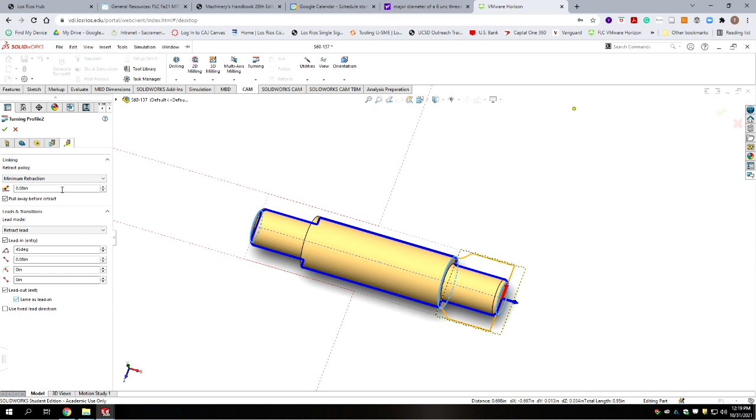Okay, so it looks pretty good. We're going to start here. It'll clean up this face. If we have any inaccuracy in depth, you're going to see a little step here. Cuts the chamfer, cuts this off, and we now have the fillet here.

Now we're going to go to the single groove. We're going to regenerate that because we need to change the references. So we've got a grooving tool, our geometry, bottom, and we're still referencing the front of the tool and the tip. Okay, we're going to the next step, and our face selection is going to be here instead.

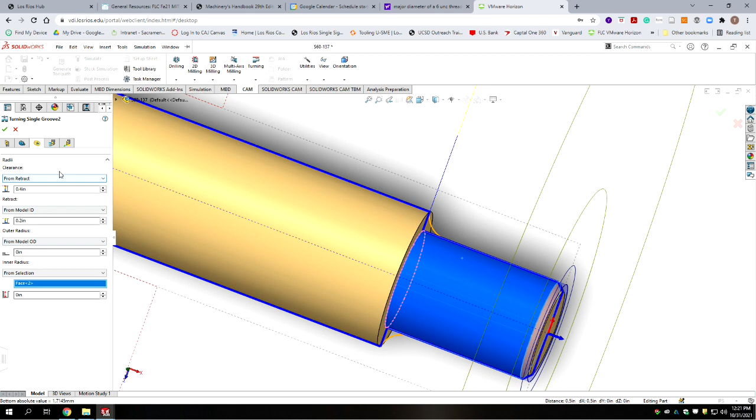Everything else stays the same, just like we did on the other side. We'll leave this all at default. We'll leave this at default. So we get a turning groove. It comes in and just cleans up the corner.

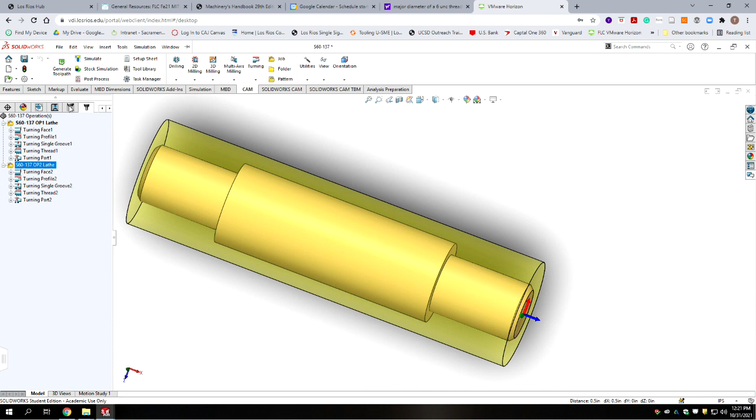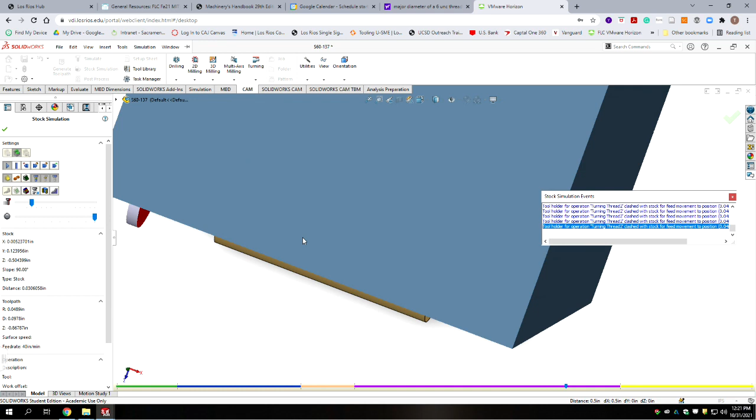So let's take a look at what we've done so far. We're going to go to a stock simulation, and it's not going to simulate the stock as if it's already milled, and that's a whole lot of gouging. Okay, so the facing operation we actually don't need. We're going to get rid of the turn face.

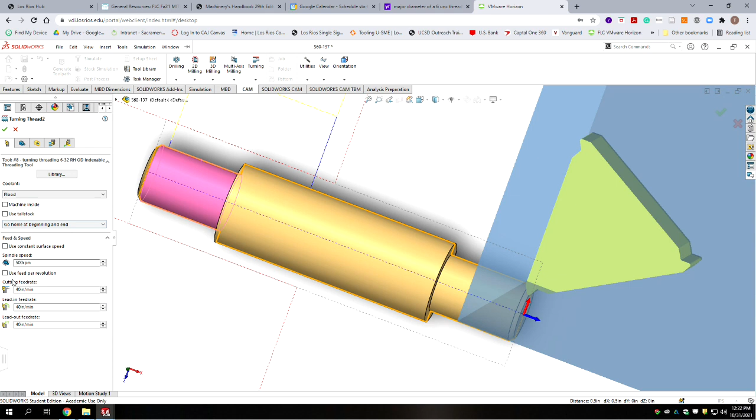And then we have our turn profile. We have our single groove. And now we need to regenerate threading because that's not where we want it. We're going to edit the thread, and we're going to go to the very first tab. Everything's good. On here, our thread is not on that face.

So I'm going to delete that face, and we're going to select the face on the opposite end of the part. We should be able to leave all these parameters the same. Now we go to the diameters, and these diameters are the same, but just to be thorough, I'm going to select the same diameter we had. Settings here should be all the same, and the settings here should be all the same.

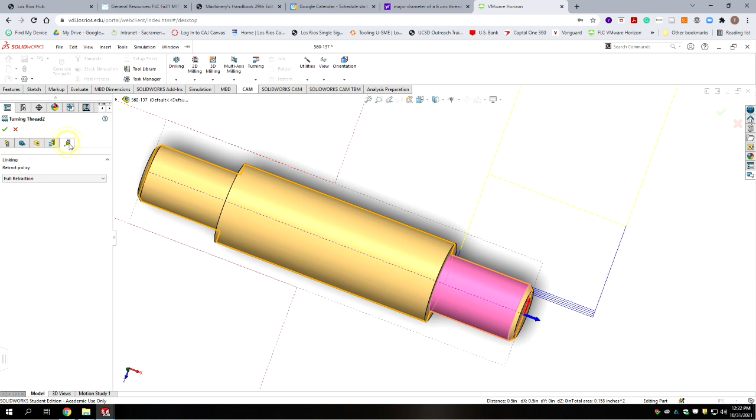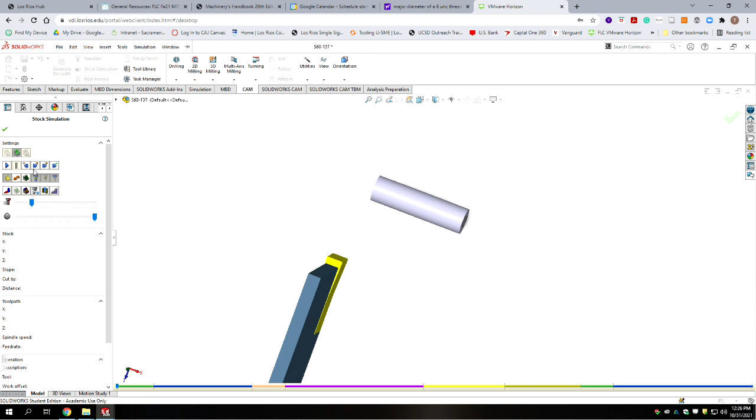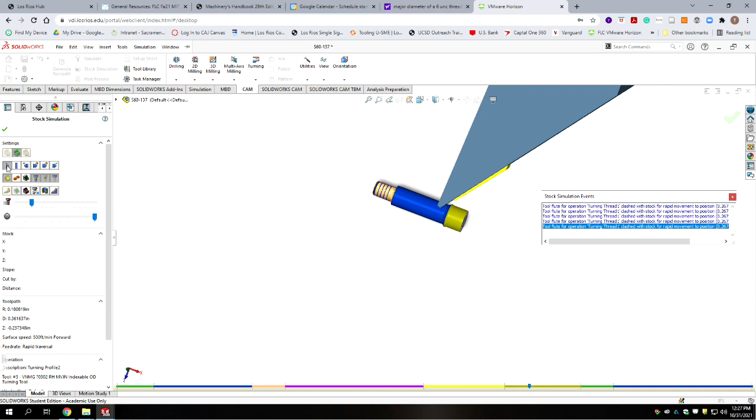We'll accept that thread. And then we don't need to part the material off, so we can delete that routine. Okay, so now we have our second program. So we're seeing the operation from both sides, as if it was rotated in the chuck, and you did the subsequent sides.

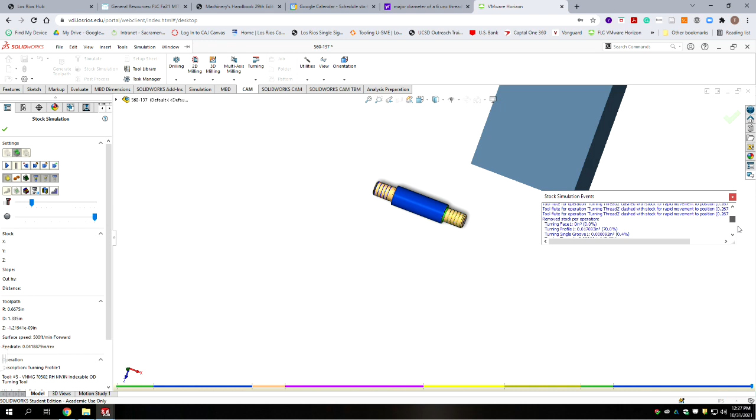Now I'm getting some collision detections on the threading. I'm not so sure it's really there, but there may be a chance that we got a little bit of a collision with an insert on the threading with the base, but from the toolpath generation, I'm not seeing it. It's pulling straight back out.

So it may be seeing that it's going to rub right up against this wall with the parameters we have in there. If we back it off just slightly, it might solve that. And it looks like the insert should be able to handle rubbing up against this wall here. Okay. All right, so what do we do next?

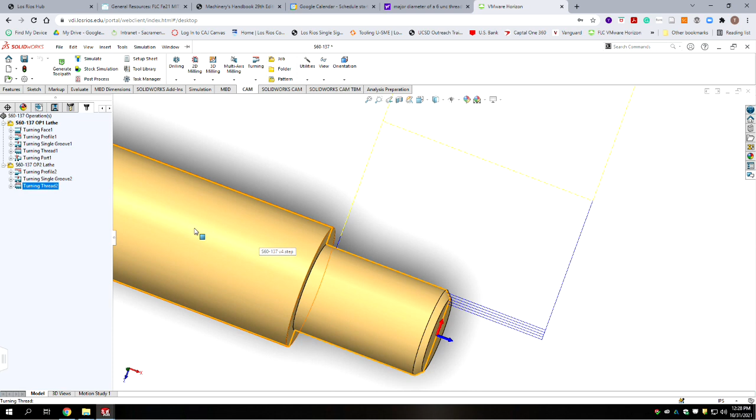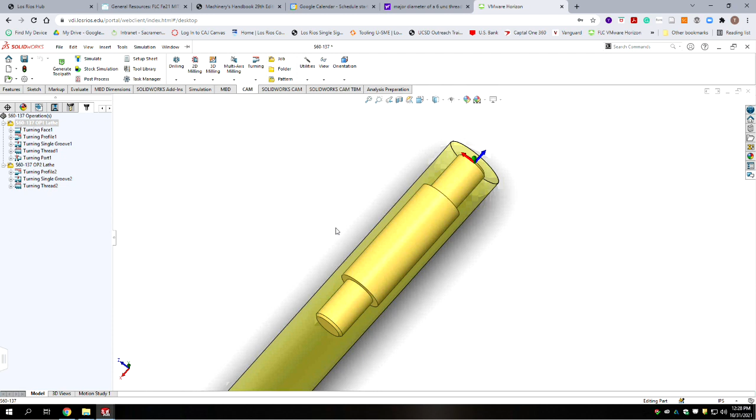So what we want to do is we want to show each respective setup sheet as if it's set up in the machine. So here we want to orientate for op 1. We want to have it looking like it's in the machine. So the red arrow should be facing away from the viewer, and the blue arrow should be pointing to the right. This might take a little finagling, but we want it to look as if it's in the chuck of the machine, and the operator standing looking from the left. And that way on the setup sheet, that'll make some sort of sense.

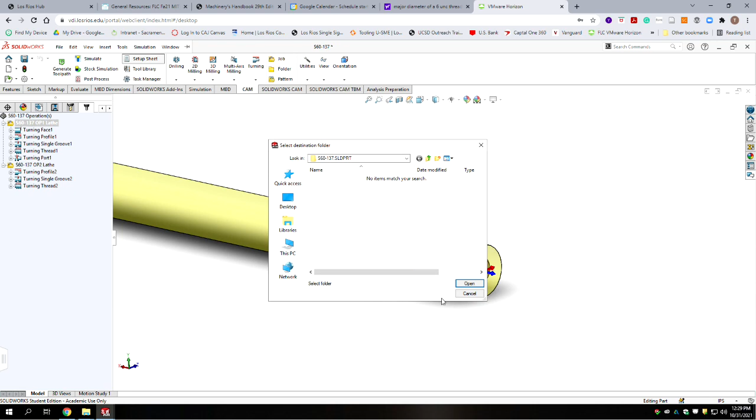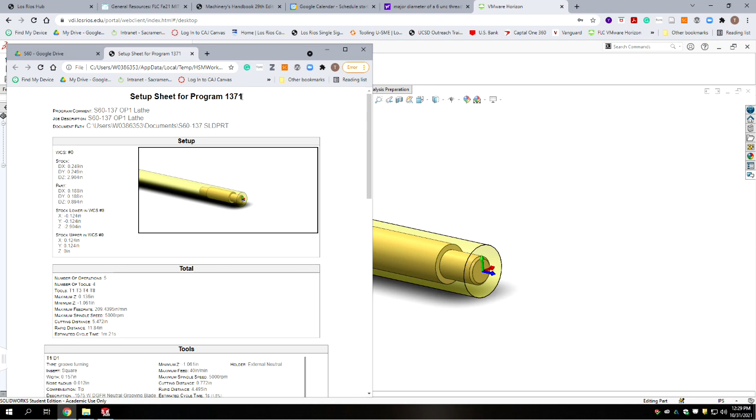Okay, so we're going to go to our setup sheet and go ahead and open it, its default location. And this gives us the image we're going to see in the setup sheet. And then we have our list of tools, and it's clear that this is for operation 1 on the lathe, and that there's more than one op because we didn't put machine complete on here. And the program number associated with that is 1371, so it's the first operation. Here are the 4 tools the program uses, and then here's the tools by operation, 5 different operations that are used. You want to save that off.

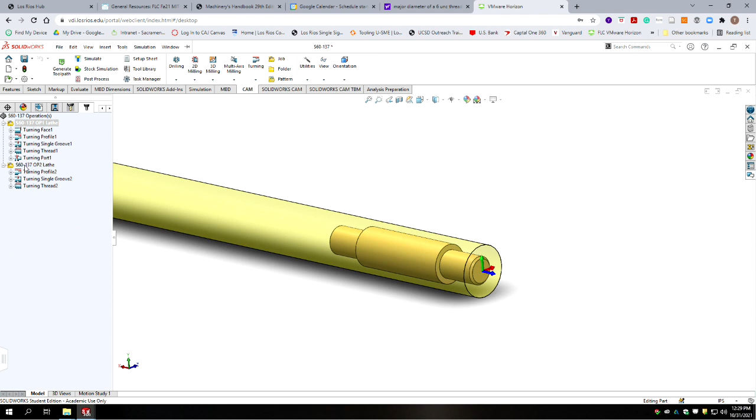Then you're going to go and highlight the other one, and you want to orientate that setup as it looks in the machine. So you got to flip it around, and you want it clear that we're just putting this little tiny part in the lathe at this point. It's been parted off from the big bar.

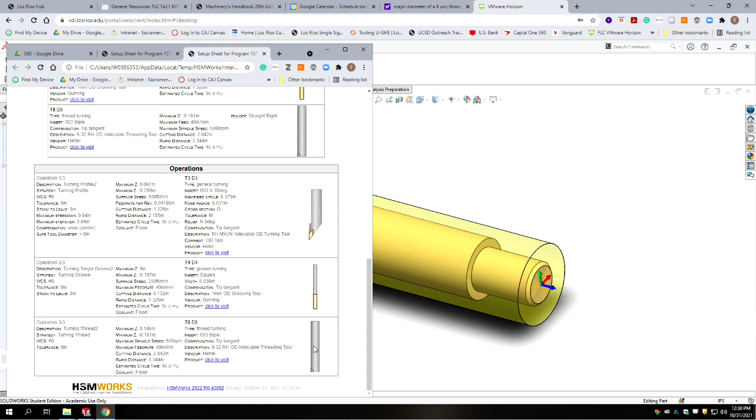Okay, then you're going to go to setup sheet and accept its location, and you notice this is for 1372, which is the second program, and it's op 2, and the image makes sense. And so we have our 3 tools we use with the 3 operations. So it's omitting any tools that were not in that particular program. So we have to set up the tools in the magazine in turret positions 3, 4 and 8.

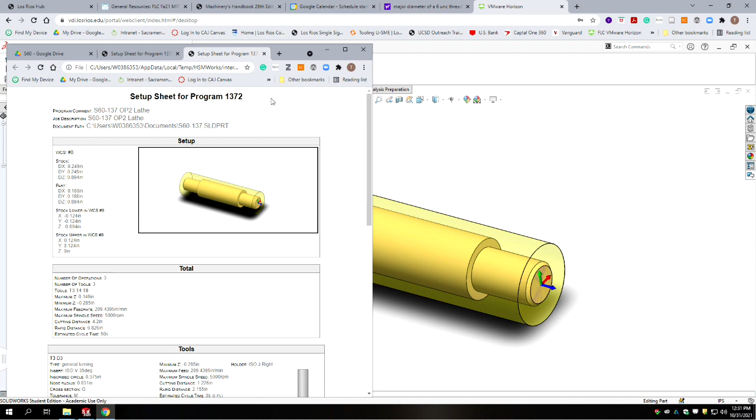Okay, so you're gonna print those as PDF, and you're gonna upload those in your Canvas assignment. Then when you're done with that, you're going to post-process each one of them. So you have to highlight the title of the job, or you're going to post-process just one segment. So I'm going to be looking to see that you have the correct number of sequences. So you're going to go post-process.

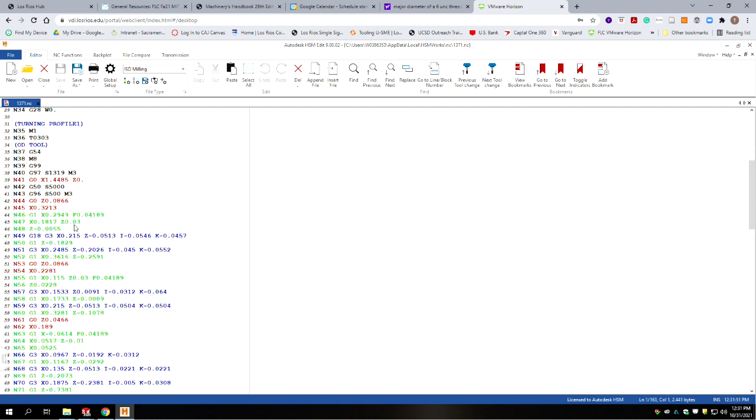It's 1371. Make sure you put it in a location you can find. We're outputting it for turning, and we're going to use the default, which is Fanuc. Okay, and you go ahead and post-process it, and you should have your code. So again, you're going to upload in Canvas a minimum of 4 files for this assignment. So you got 2 setup sheets and the corresponding code files.